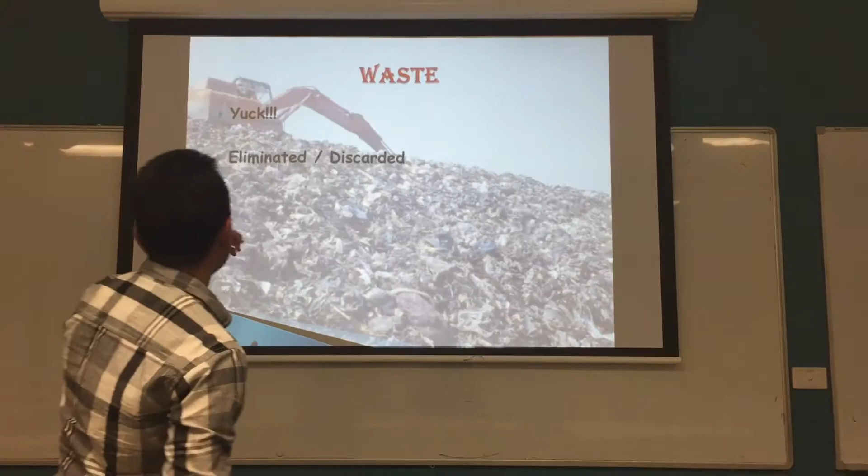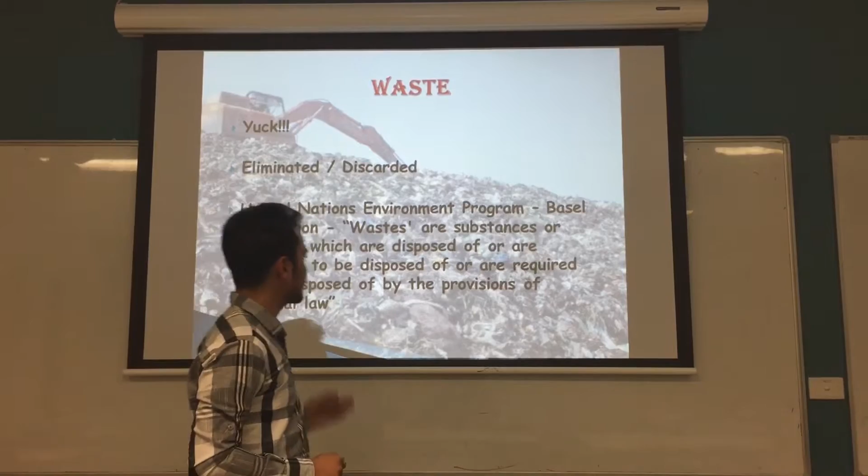Alright, and waste is something that is eliminated and discarded after its primary use, and by definition of the United Nations Environment Program Basel Convention, wastes are substances or objects that are disposed of or are intended to be disposed of or are required to be disposed of by the provision of national law.

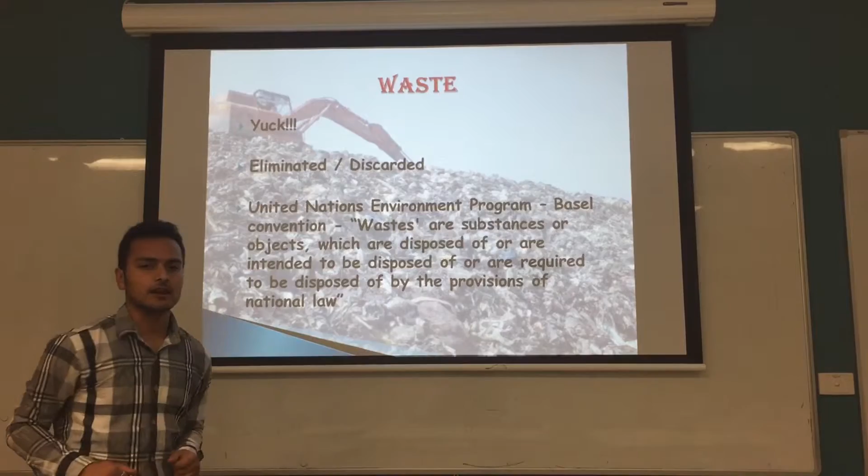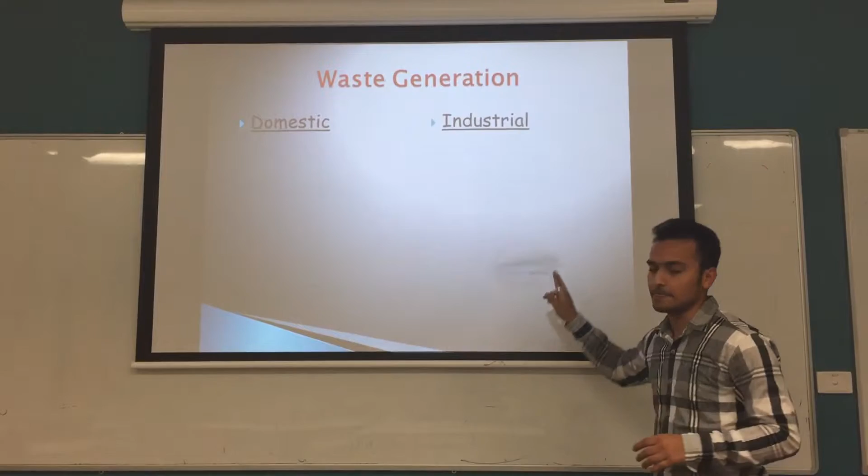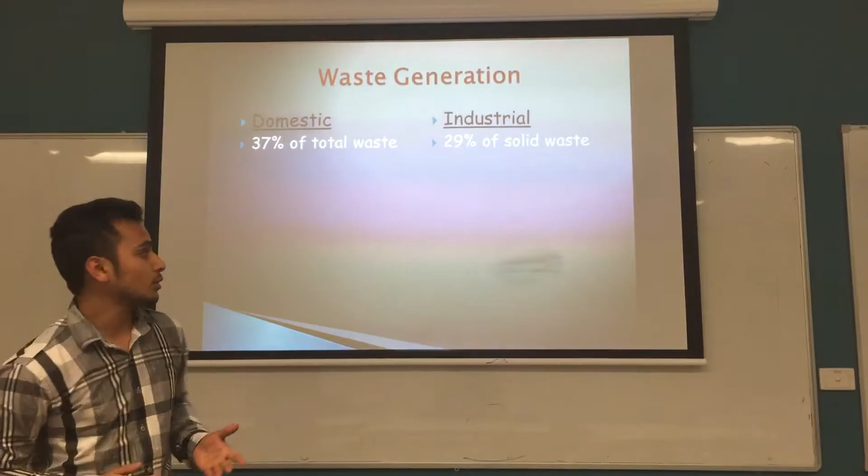And about waste generation, I am going to talk about the two major waste contributors. One is domestic and another the industrial sector. Domestic waste contributes around 37% of total waste, and industrial waste contributes around 29% of solid waste. As we all know, domestic waste are bottles, cans, clothing, compost, food waste, food packaging, newspapers, magazines, and yard trimmings.

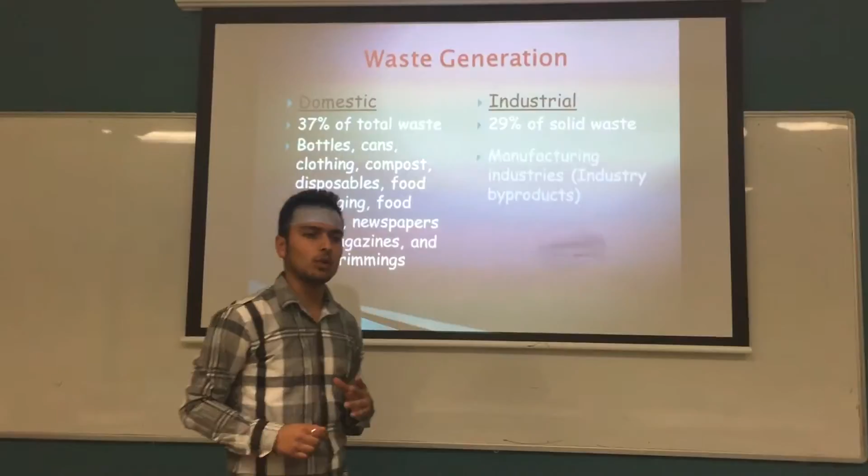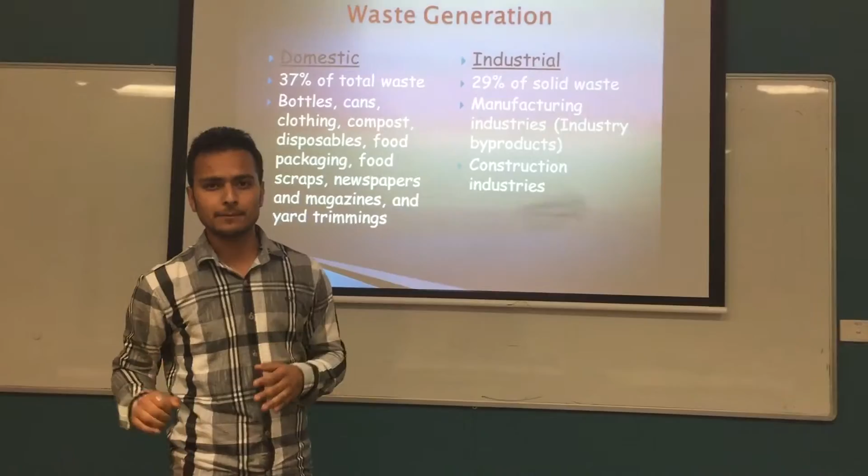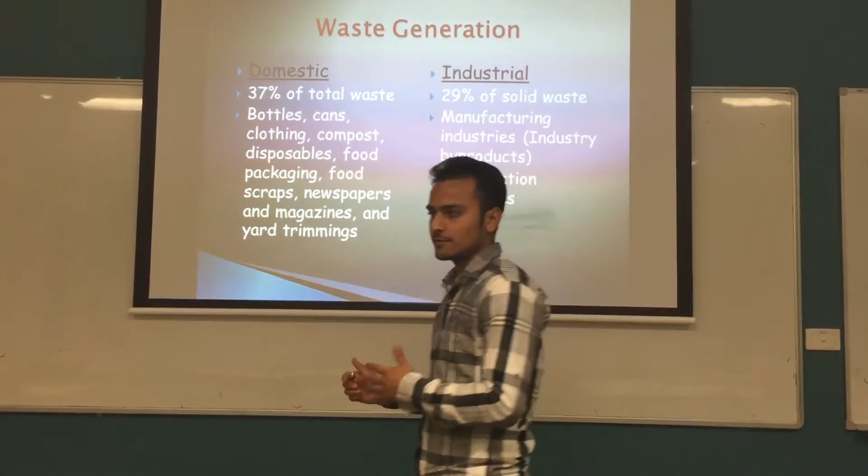And industrial waste is divided into two categories, that is manufacturing industries and construction industries. Manufacturing industries waste are the industry byproducts, for example, the coal factory waste are fly ash, coal slag, bottom ash, etc. And construction industries waste are the demolition waste like aggregates, mortars, etc.

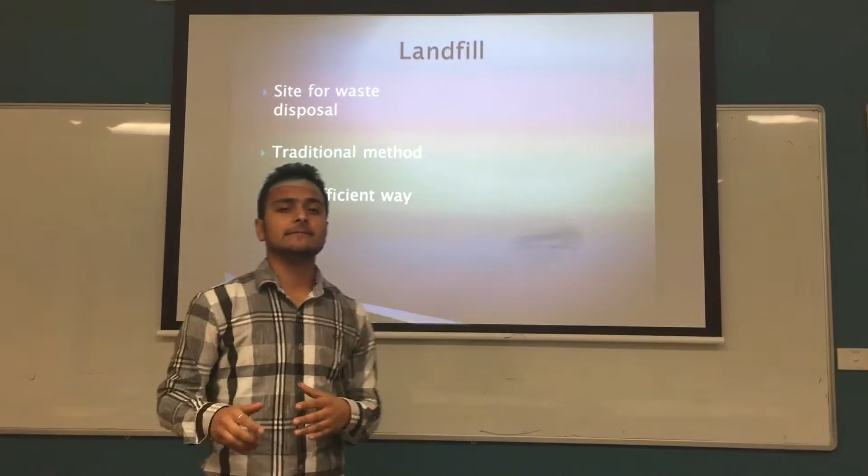And landfill, while talking about waste management, we can't ignore this term landfill, as it is the site for waste disposal. It can be some open area or some area that is excavated, and it is a traditional method applied by almost all the countries worldwide, and it has been applied for quite a long time, and also it is a cost efficient way, because there is no other need than to collect the waste from industries and domestic sectors and transport them to the landfill site.

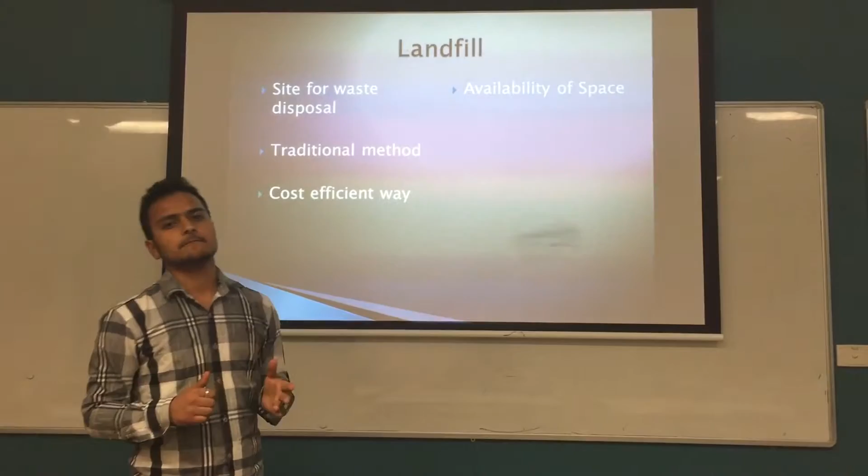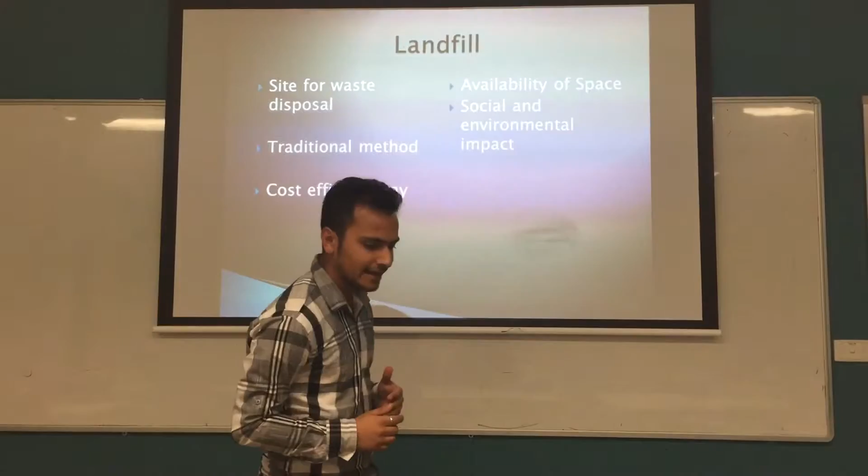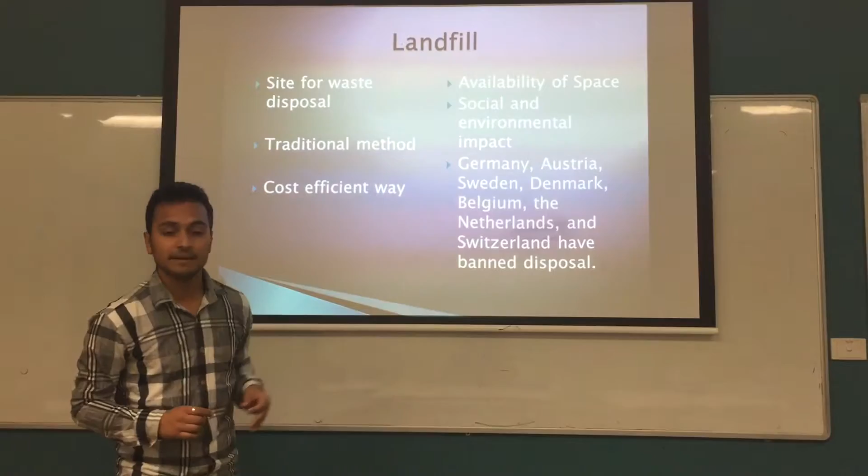But it has also several disadvantages, like availability of space is already one of the concerns for landfill, and it will for sure be a major concern in the future. And it has several social and environmental impacts, as it can cause air pollution in the surrounding society. And some major European countries like Germany, Austria, Sweden, Denmark, Belgium, Netherlands, and Switzerland have already banned the disposal of wastes in landfill. The waste management system of those countries can only throw waste materials in landfill after treating them properly.

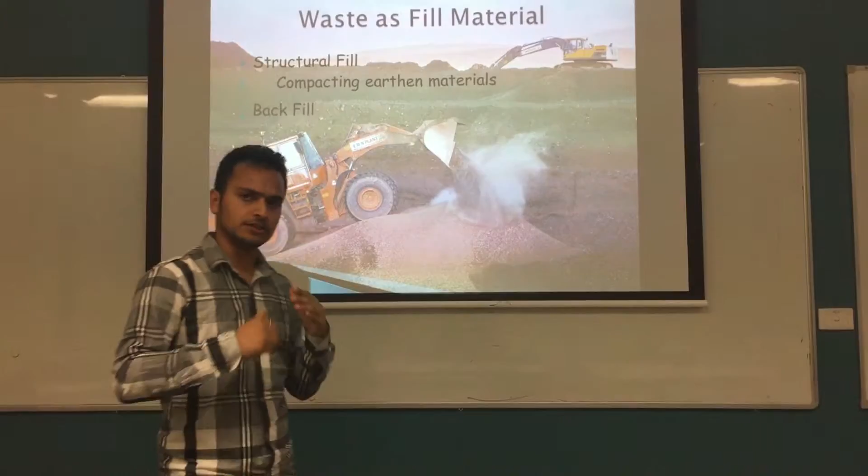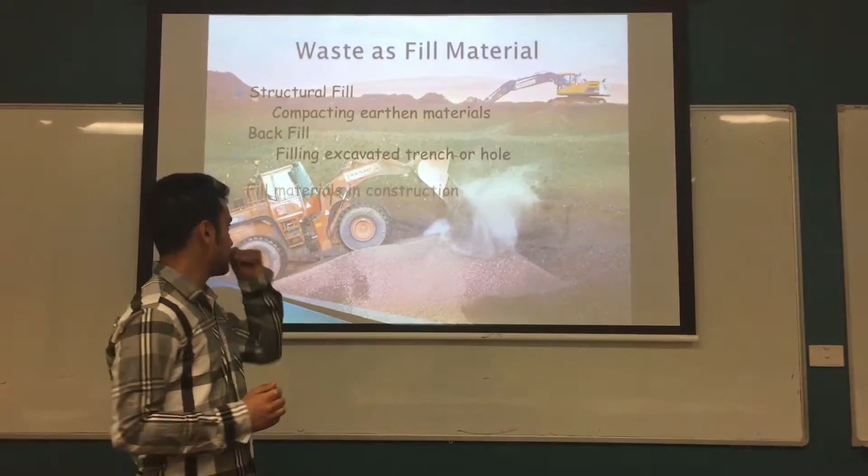And several researchers have done research in waste management. Several laboratory experiments and in-situ tests are already being performed, and using waste as filler material has been currently introduced as one of the best ways to manage waste, as the waste can be used in the structural fill by compacting waste materials and some other earthen materials, and also they can be used in backfill, as in filling the excavated trench and existing holes. Also, waste can be used as filler materials in construction. Waste can be used in replacement of cement and concrete in the construction industry.

And talking about the materials that can be used as filler materials, almost all the industrial byproducts and waste materials can be used as filler material, as the tire chips and scrap tires from rubber industries can be used as filler material in construction.

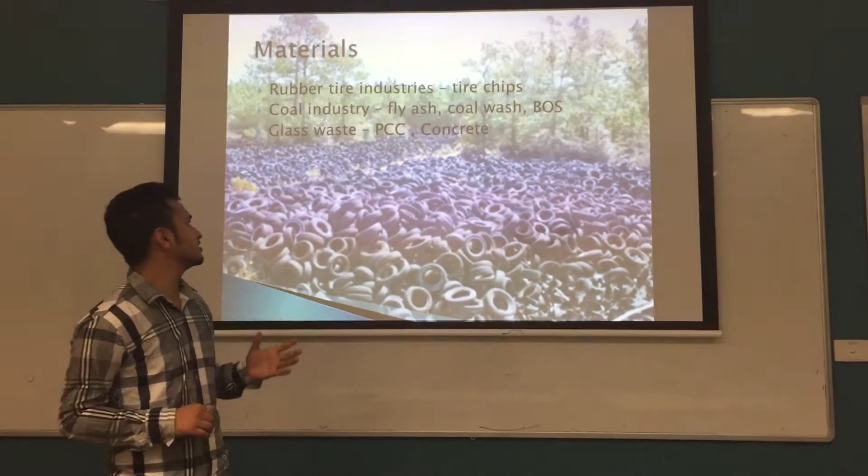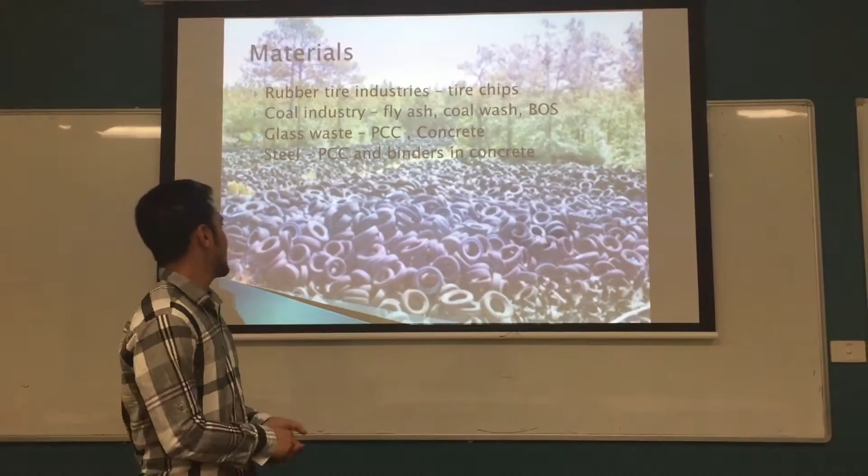Fly ash, coal wash, and basic oxygen slag can be used as filler material, and glass waste can be used as fine aggregates and coarse aggregates in concrete, and also as PCC, and the steel industry waste can be used in PCC and binders in concrete.

And as we all know, every research has a cost benefit analysis. There is the cost benefit analysis in using waste as filler material, as it has been known to reduce the consumption of natural resources, and it has also been one of the most effective methods for stopping the human exploitation of natural resources.

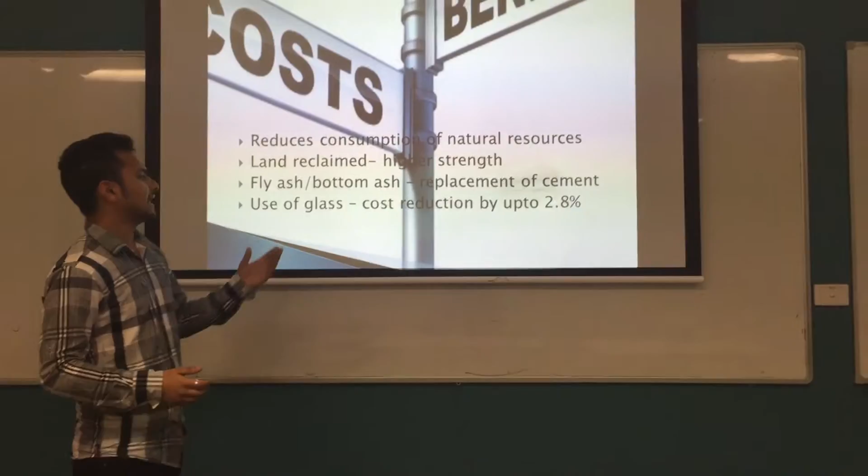And some experiments show that the land reclaimed by waste materials has better strength than the original ones. Also, fly ash and bottom ash can be used as replacement of cement. Fly ash can be used as 100% replacement of cement, and bottom ash can be used as partial replacement of cement. And also, some experiments show that the use of glass in filler material can reduce the cost of construction by up to 2.8%.

And as I have already said, using waste as filling material has no negative impact on the environment. And also the civil construction waste, if used as filler material, helps to reduce proliferation of vector-borne disease, and it has a better environmental aspect.

And I have considered several research studies, and there were some research gaps, as they had been done for short-term analysis with no long-term analysis, some were only performed on laboratory scale, and some are only controlled demonstration projects. Availability of fill material in the long term has not been mentioned in some other research, and also cost-benefit analysis and environmental impact in the long run have not been mentioned.

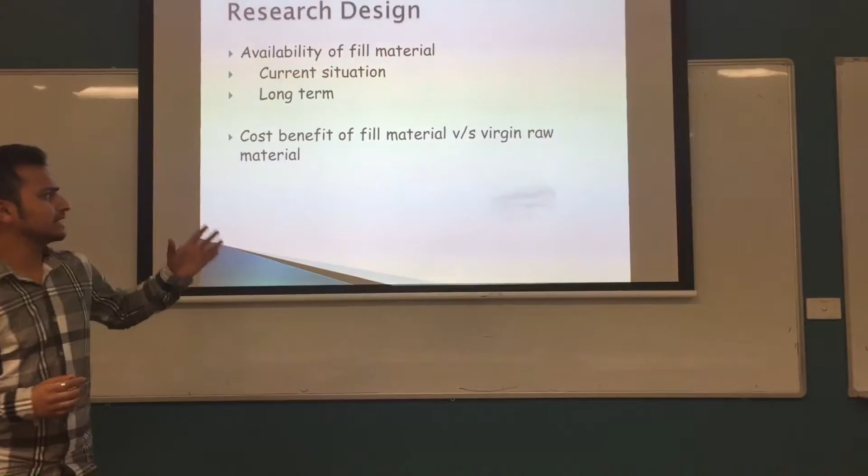And I'm going to do a research design which will include the availability of fill material, not only in the short term and the current situation, but also in the long run, and also cost benefit analysis of fill material versus virgin raw materials, and the short term and long term environmental impact of using waste as filler material.

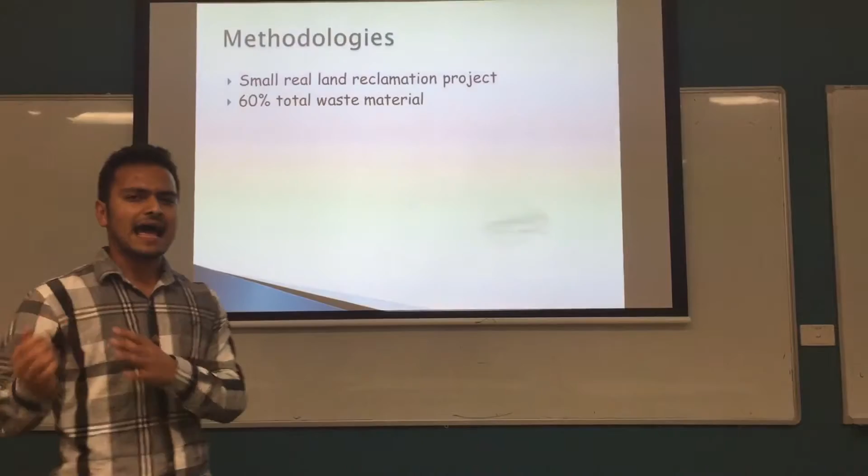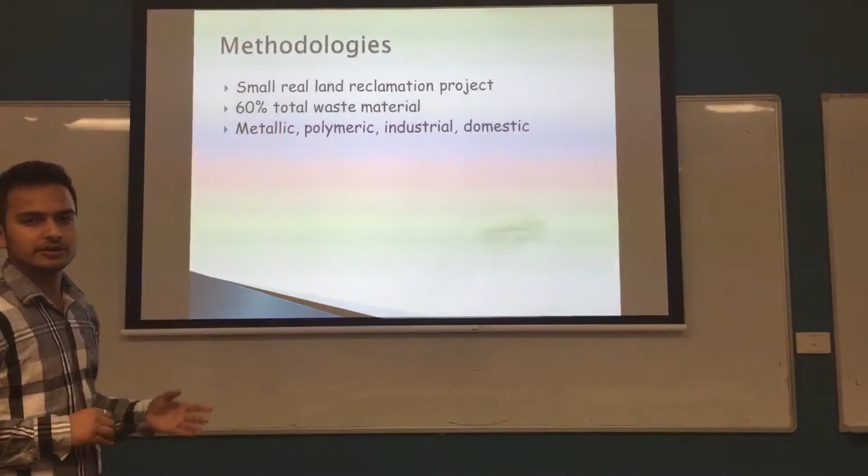And the methodology will be constructing a small real land reclamation project, where we'll be constructing a real island using fill materials, and total waste materials will be around 60% of total materials, and these wastes will be metallic, polymeric, industrial, and domestic. They are divided into 4 components. The total duration of the project will be 5 years, and the study will be done in different phases.

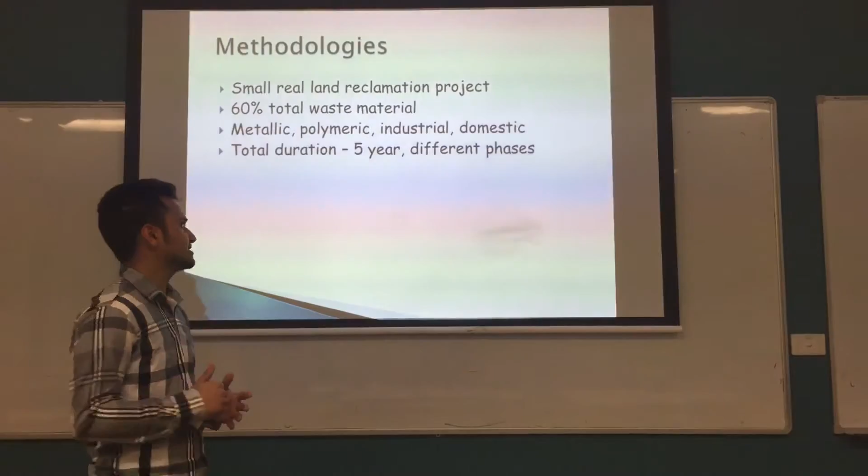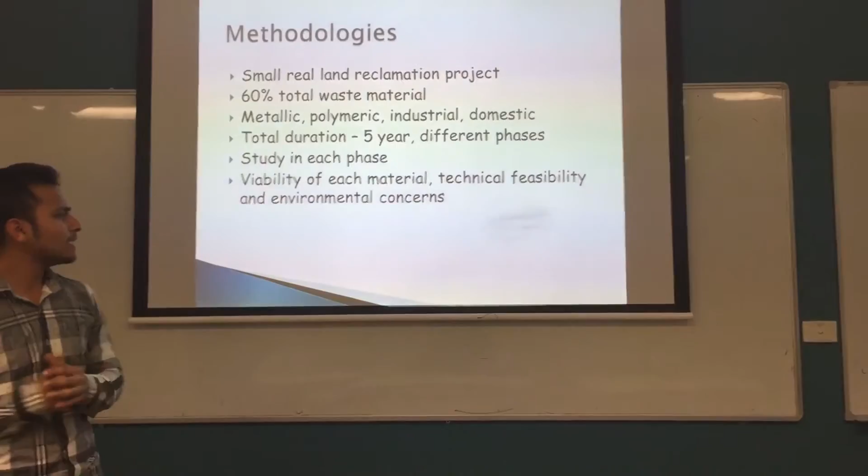As I have said, study will be done in each phase, and the viability of each material, technical feasibility, and environmental concerns will be the major part of my research. And also we'll do SWOT analysis, that is strength, weakness, opportunity, and threat analysis.

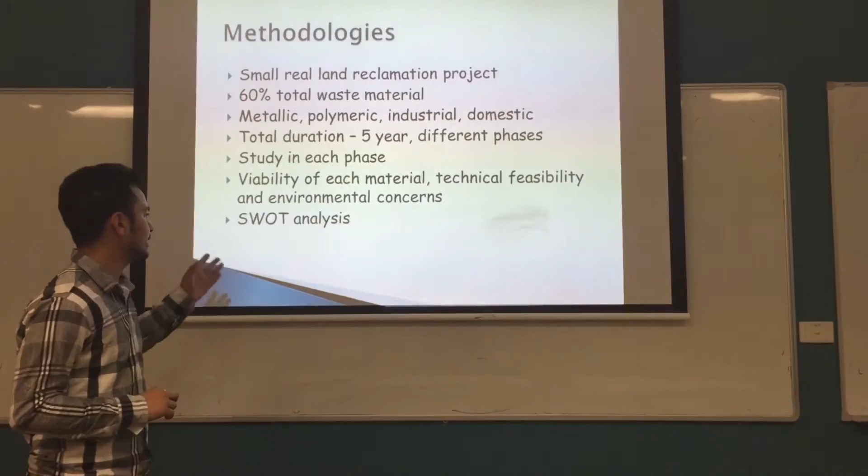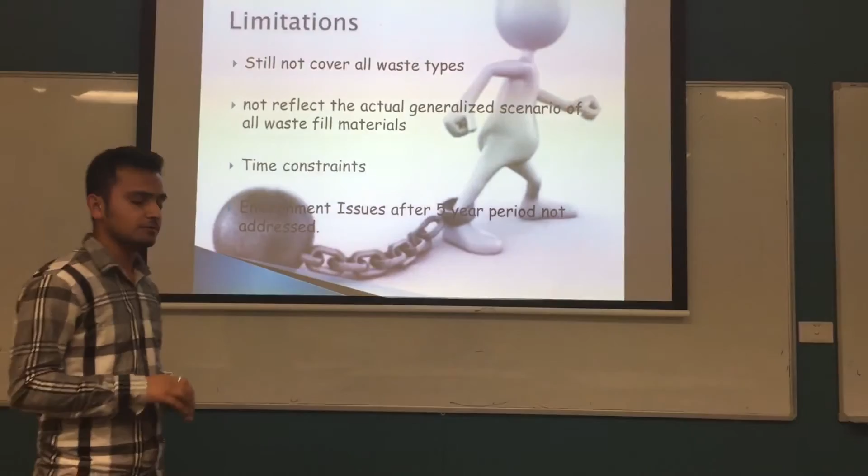There will still be some limitations in my project. It will not cover all the waste types. I have already said that only 4 waste types will be considered in the project, and it will not reflect the actual generalized scenario of all waste fill materials, because only 4 materials can't summarize all the waste materials, and there will be a time constraint of just 5 years, and environmental issues after the 5-year period will not be addressed.